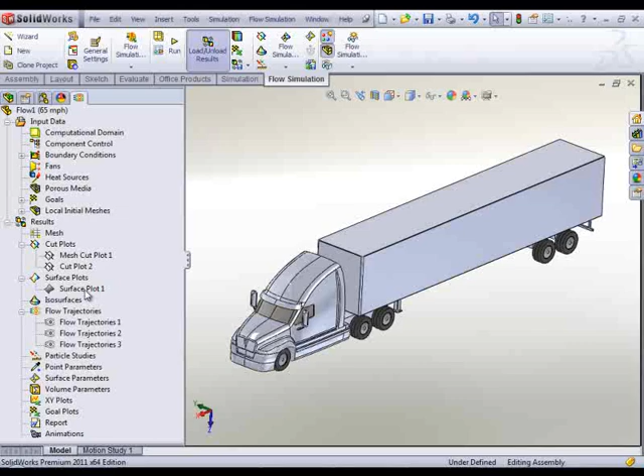So here's the original geometry that Jeremy looked at. That was the scanned model from that toy truck model. So what we'll do is take a look at some of the results in Flow for this, and then how that was set up. What I'll do first is make this a little bit transparent so we can see the pressures on the body itself.

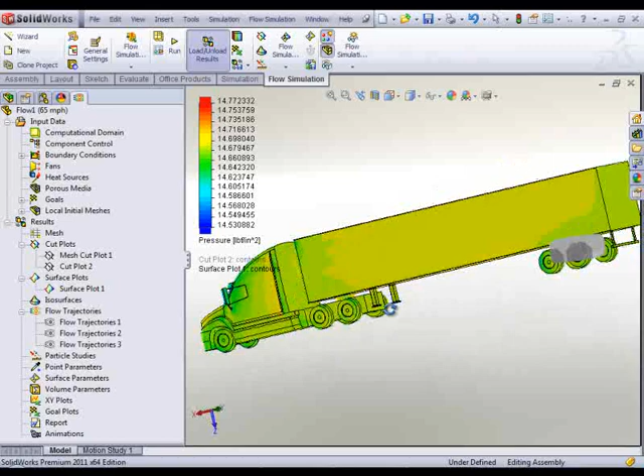So here's the pressures on the truck, and you can see all the flat parts of the truck that are exposed to the direct air, like in the front here, up along the corners, and even the wheels in the back there, have the highest pressure. Rotate this around the back side. You can see some lower pressures here, and we can go ahead and probe pressures wherever we want.

All right, and so this gives a nice picture of the differences in the pressures from the highest pressure to the lowest pressure there, perhaps in the back. Well, that's not the lowest pressure, but where a low pressure region is. All right, we can also show.

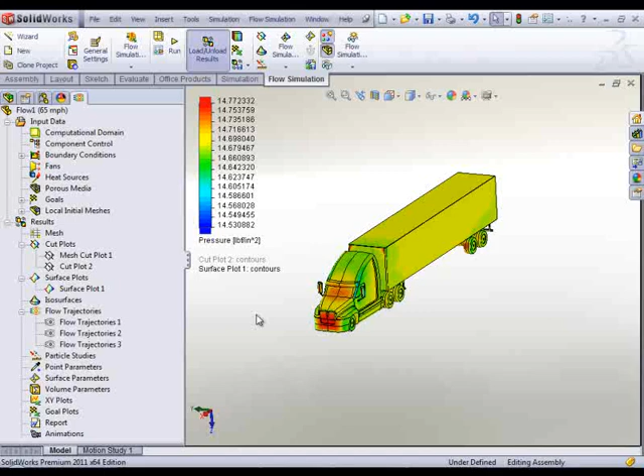Let's take a look at the front of the truck here. You can see some of the low pressure areas around the sides here. If I increase this a little bit, it becomes a little bit clearer. Very nicely. I like that functionality in Flow, being able to do that. And I can show the flow trajectories showing velocities on top of this.

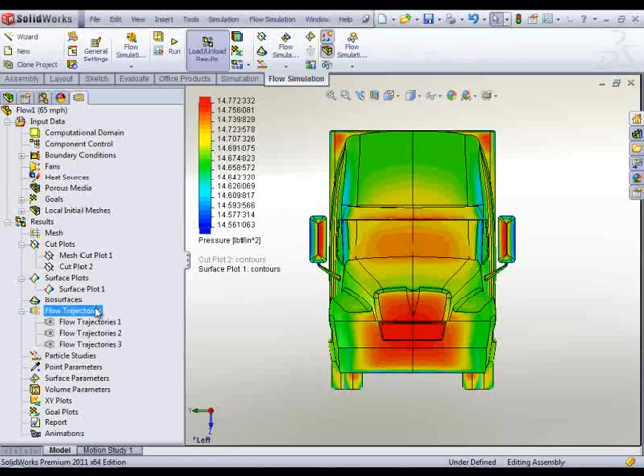So let's do that. Showing these two values here on the same plot is something new in the 2011 version that I'm using here. So velocity for the flow trajectories and pressures on the surfaces of the truck. Let's rotate this model. So you can see the velocities moving across here along the truck.

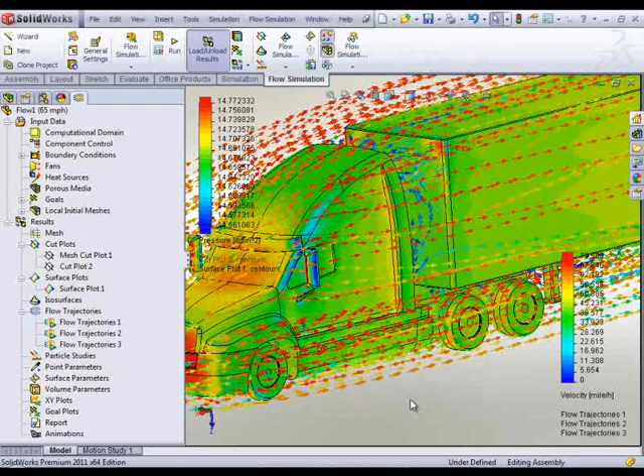And if we look at a side view, let's hide this one and zoom in to the region between the cab of the truck and the trailer. And you can see this tornado, the hurricane of air that Jeremy was mentioning earlier.

Now if we focus on the back of the truck and zoom in on that, you can see the flow coming along the top and along the bottom, and creating a low pressure zone in the back here, causing this velocity to be moving like that, this oscillating, recirculating flow there.

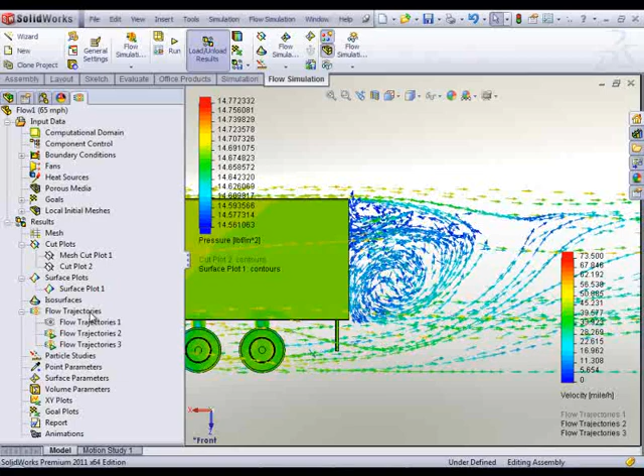It can also become clear if we take a look at the cut plot. So let's take a look and show that now. So first I'm going to hide these flow trajectories. So here we see the cut plot showing the velocity vectors on top of that, and the low pressure.

These are all colored by pressure, both on the surface of the truck and on that slice through the middle of the truck. And by redoing the numbers on the chart here, we can see that low pressure region a lot better here, and we can probe that as well on the cut plot.

All right, so those are nice little images here. Gives us a nice visual picture of what's going on. But you can also look at, from your goals, what your coefficient of drag is.

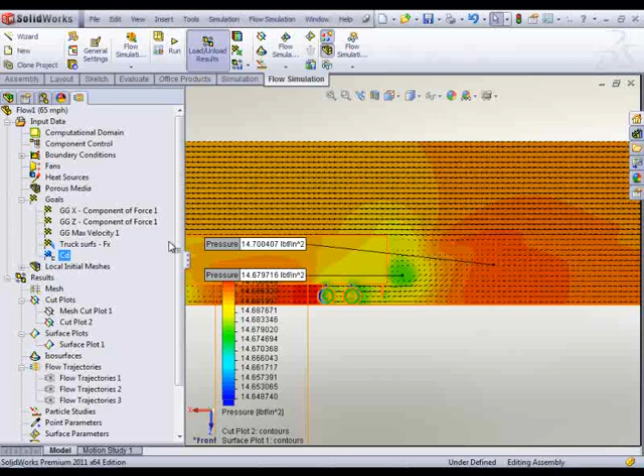So let's take a look at how we set this problem up and what was the mesh that was able to calculate these values. So if we go through the setup here, we have our computational domain. This is where the calculation is being computed. So you can see that we have it quite large in the back.

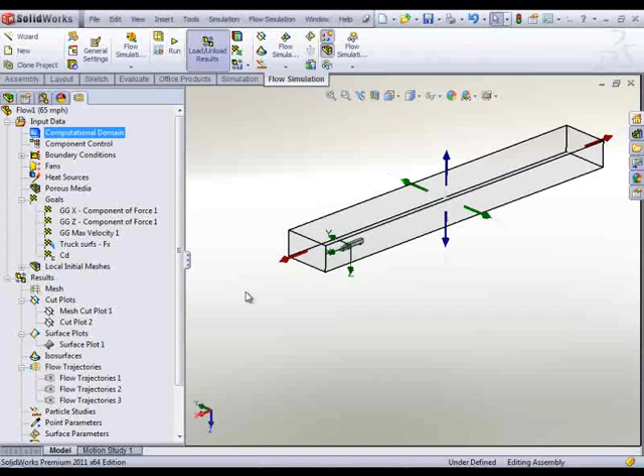Take a look from the front. We give enough room on the sides as well as the top as well. All right, but the back is the most important region. That's where all the wake is, and the larger that it is, the more computation you have to do. So you need to take care of that when you're doing the mesh.

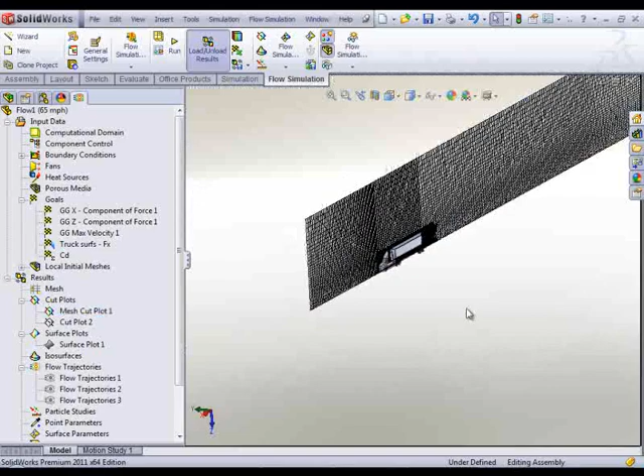Here's a cut plot of the mesh for the entire domain, and as you can see further out, you have larger cell sizes. Then by the truck, we've used some local mesh controls, so local initial mesh here, around the truck. And we did this by creating some geometry around it. So let me just show that.

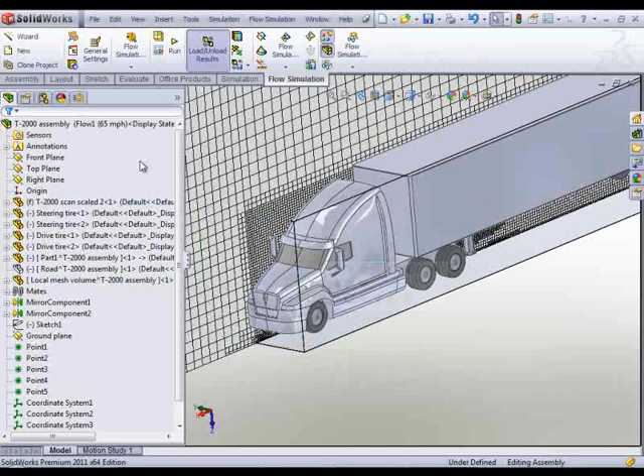And you can see this transparent box that was extruded around there. And in the Flow software, under the component control, you can make these local mesh. Disabling that allows flow to move through it. It doesn't see it as a solid. But you can use that then to define some local mesh control. So that's what we've done here.

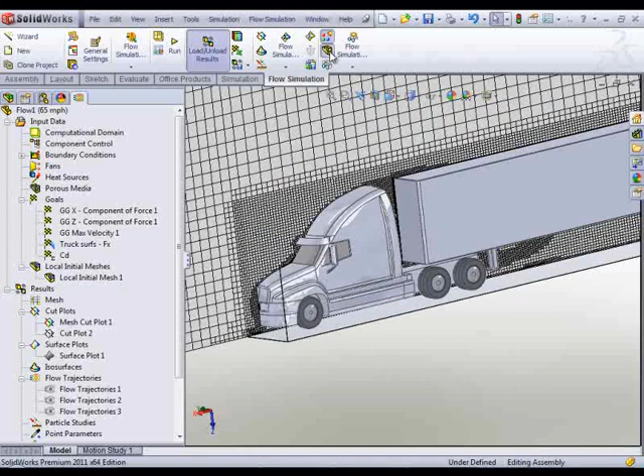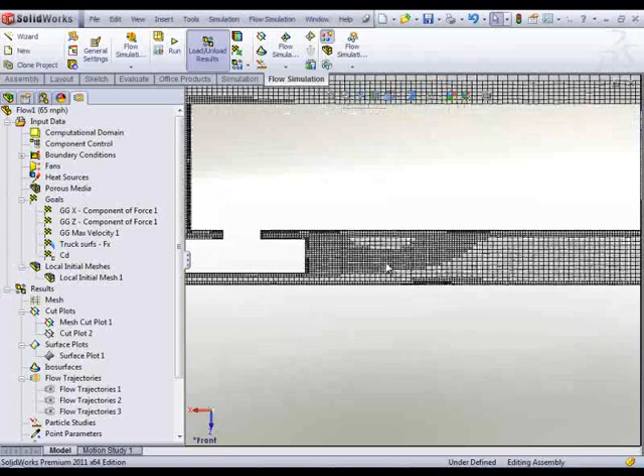Additionally, if we hide the geometry, you can see the mesh being refined just around the truck, and that's due to an adaptive meshing technique that you can also incorporate into the Flow software. So it captures all the small, fine little details in the flow. After a number of iterations have been run, it captures the velocity and pressure gradients. And if you're doing a thermal calculation as well, it'll capture the temperature gradients.

So you can see how we're able to capture these areas where it's very crucial. So it's done a nice job in doing the meshing here for this model.

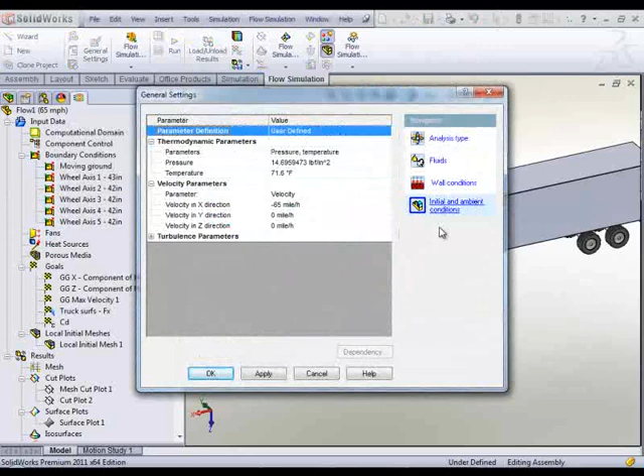All right, in the setup of the problem, we go through a wizard to do that. And in the general settings, we put in the velocity of the air moving in it, just as if it was going through a wind tunnel. The temperature of the air and the pressure and the ambient, so we can set it like that very easily.

We have some boundary conditions. Boundary conditions are very easy to set in SOLIDWORKS Flow Simulation. You can define, typically if you do an internal flow, mass flow, volume flow, velocity, pressure boundary conditions, or moving walls. And in this case, we have some moving walls.

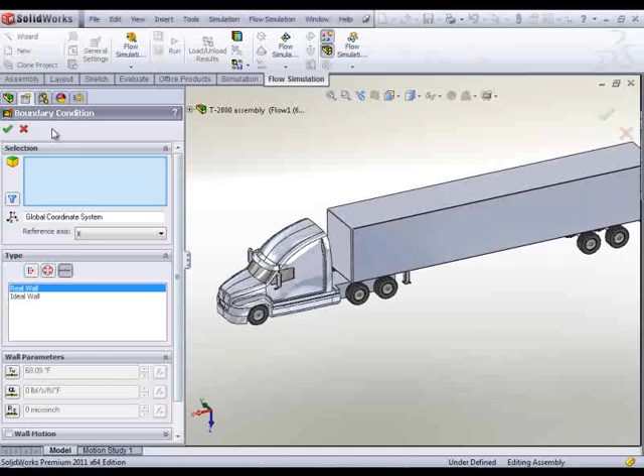We have the ground, which is going to simulate the road moving underneath the truck. So we specify a face, which right now I have the geometry hidden, but we put in that minus 65 miles per hour there. Then we have the wheels rotating.

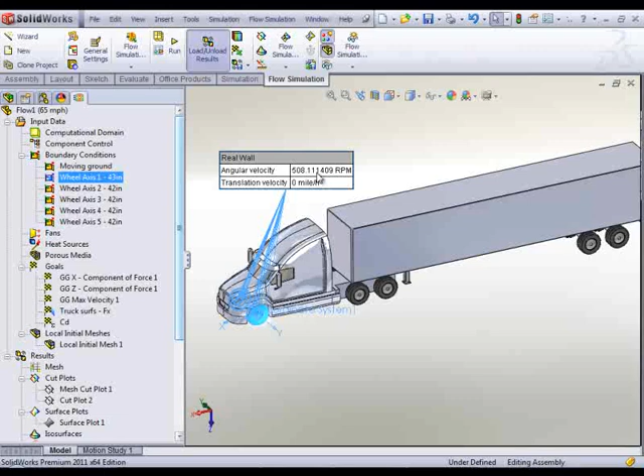And you can see we selected the wheels, defined a coordinate system for the axis, and put in the rotational speed of that, which you can calculate based on the diameter of the wheel as well as the speed that it's moving in a linear direction. So we've done that for all these wheels, each and every set of those.

All right? And then we put in our goals. We have the first three here, X and Z component of force in the global. So these are global goals. Those are used for convergence criteria, as well as the max velocity globally that's used for convergence control.

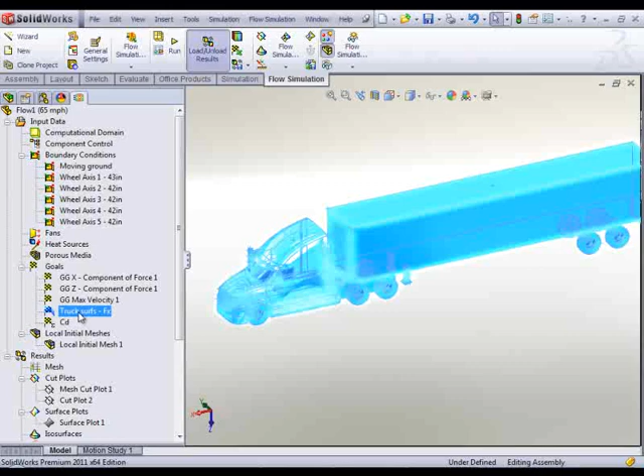Now, for calculating the coefficient of drag here as an equation goal, what we need to do is find out the force in the x direction that is moving against the truck. So we select it like that. So these are surface goals. And then we can edit and show you the equation goal for calculating the coefficient of drag.

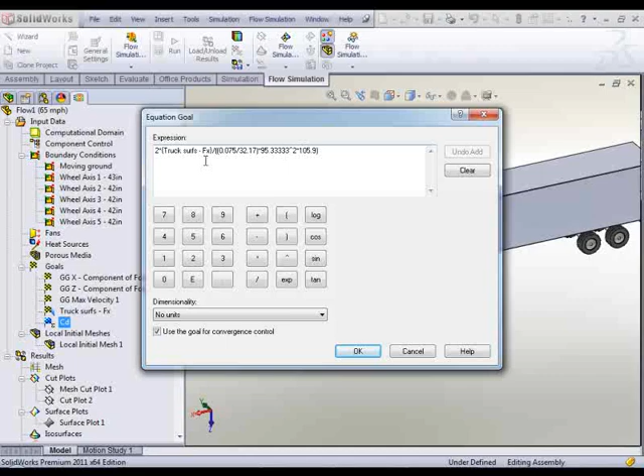So this is twice because it comes from this dynamic pressure, 1/2 rho. So this is the density of air divided by gravity. And then we have v squared. So this is the velocity in feet per second. And then the frontal surface area of the truck. So that's very easy. You can set up that calculation, and that calculates the coefficient of drag, which we mentioned was closely matched with this model here for the real one.

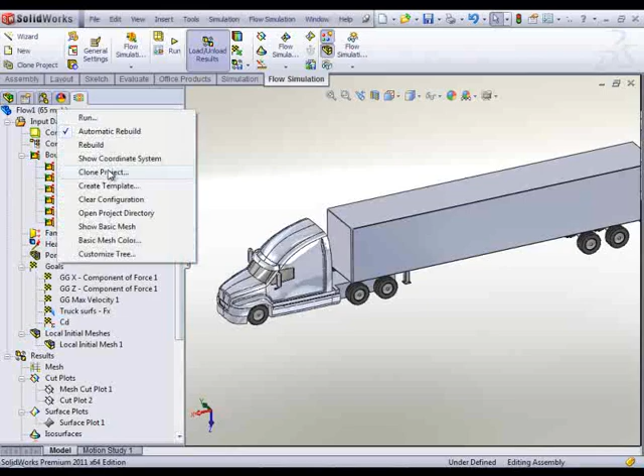If you wanted to start this problem and maybe change some of the geometry to see how that affects the results, you can do that very easily by cloning the project. Let's take a look at an overview of the results that Jeremy had calculated. So this is again the original design showing the flow trajectories.

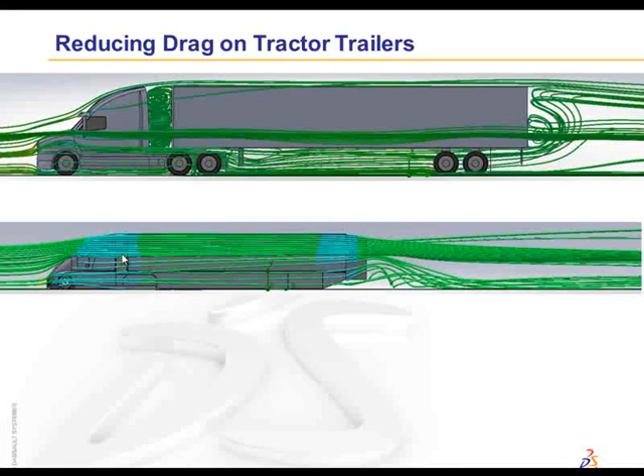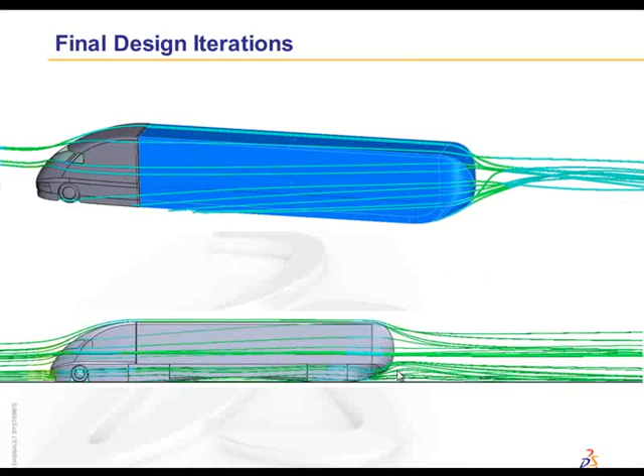Here's an iteration that he had worked on with some of the boat tail and the skirts along the bottom, as well as closing up the gap in between there. He did some more refining, adding some curvature there, and continually modifying this. Here in the skirt, raising it up a little bit, so that in his final design for the super truck, they were able to reduce 60% of the drag from that original model, and that translates into about 30% better mileage.

So here's the first iteration of the super truck built on that truck platform, and then for the future truck coming out later, they're going to break all the boundaries, not having to deal with a given platform, able to play with the positioning of the tires and other things that they weren't able to do on the existing platform. So there's going to be more information on that.